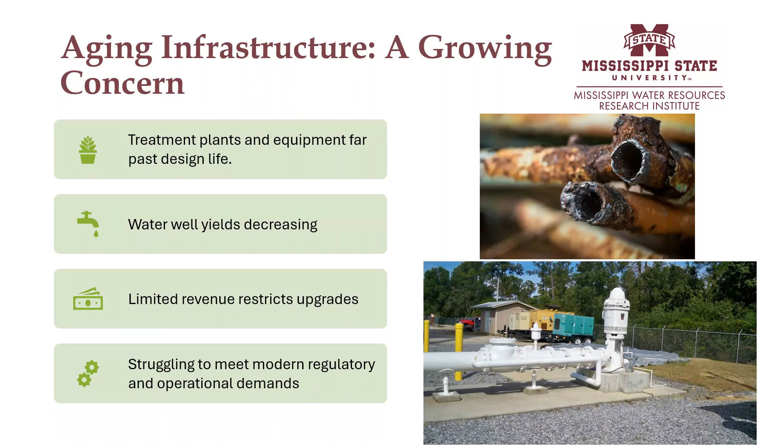Another thing is they're struggling to meet modern regulatory and operational demands. There's new regulations coming out annually, and it's a lot more intensive treatment than we may have had 30 years ago. So some of the key problems that I see in my line of work are aging treatment plants. That's what we can see. Pump facilities, those are obviously right there with treatment plants. Water quality degradation, whether it be because of distribution or storage, or the treatment itself. Distribution system deficiencies.

When you're talking about water age and the water quality throughout the system, it's all based on the treatment and how long it sits in the distribution, and how can we go about to solve these problems.

One of the biggest things that I see is antiquated electrical components. Most of these rural water systems that were formed in the 70s and 80s have honestly not upgraded their electrical components since then. And so a lot of them are falling behind, and they have issues on a daily, weekly, monthly basis with electrical problems, to where they're having downtime, and it's just causing major headaches.

Sanitary defects and contamination risk. Once the infrastructure throughout the system gets as old as it is, you start having problems with sources of contamination entering the system. Operational and customer impacts. I would say one of the biggest issues in Mississippi that we talk about these days are customer relations and the aging workforce. So we'll talk about these things.

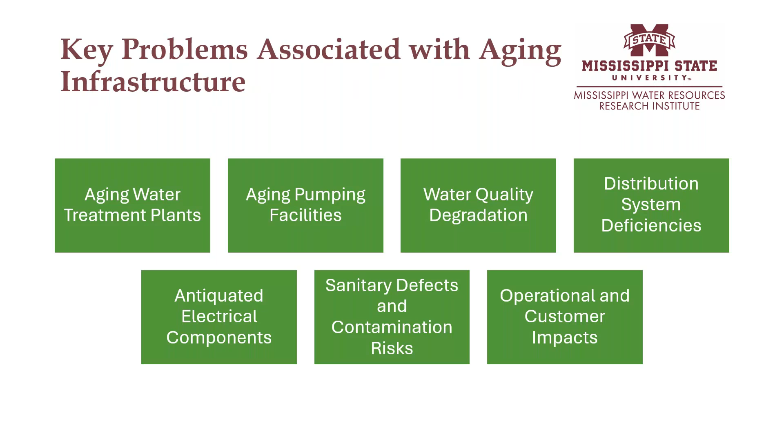So some of the technical challenges and solutions, like I said earlier, a lot of these water systems are operating beyond their intended design life. They were never designed to last 60 years without major upgrades. So they're starting to pose risk to water quality, system reliability, compliance, and public trust.

One of the biggest pushes over the past couple of years is the revisions to the lead and copper rule, which has forced a lot of systems to do this lead service line inventory. And not only does that bring awareness to service lines, but it brings awareness to the distribution in the water systems. So a lot of officials and operators both have begun to take note of what's in the ground, and now that they can see it on paper, it's really bringing to light how old stuff is and how bad a shape it is. So it's bringing a renewed attention to the issue of the aging infrastructure.

Some of the limitations: these treatment facilities were designed for water quality conditions that may have been, you know, from the 1960s, 70s, when they were designed. The regulatory standards were lower then. The system demands were lower.

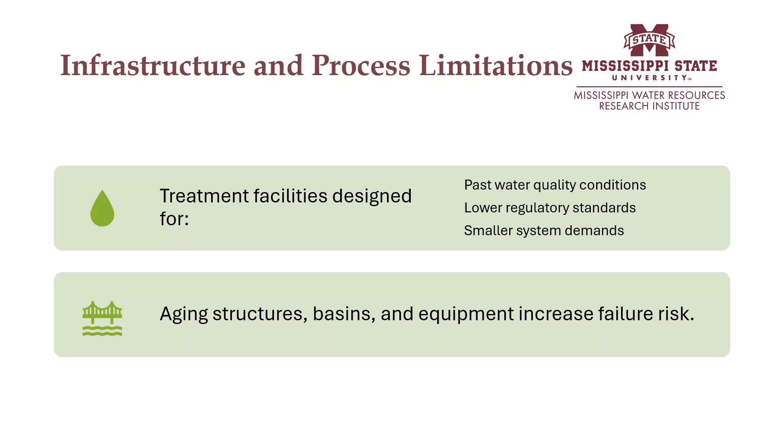Water quality compliance risks. When you have treatment that is not reliable, whether it be from filter media, whether it be from chemical feed pumps, whatever, at the treatment plant, you're going to impact your turbidity removal, iron or manganese removal, disinfection effectiveness, disinfection byproduct control throughout the distribution, your optimization control, and without redundancy, you're increasing your vulnerability during equipment failures, during maintenance activities, system outages, chemical process downtimes.

One thing I see more than anything is no redundancy on these small systems, and we can't preach that enough that these systems have redundancy, even just as simple as a chemical feed pump to have a backup. These systems have got to get the redundancy in place so there is no downtime.

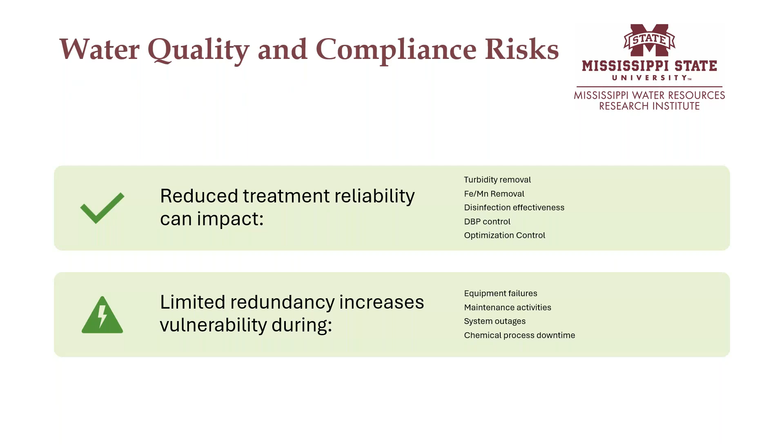Some of the operational challenges: you have obsolete equipment and controls, and those limit your process optimization, your water quality monitoring. You can't collect data properly. Without those things, it's hard to track what your treatment plant is doing. It's hard to keep track of what's going on in distribution. So we really need to have more up-to-date controls put in place to where you can properly monitor those water quality parameters throughout the system.

When you increase your reliance on your operator intervention, it increases operational risk. So it's more room for error. So the more an operator is in the treatment plant making changes to equipment, the more room for error that arises.

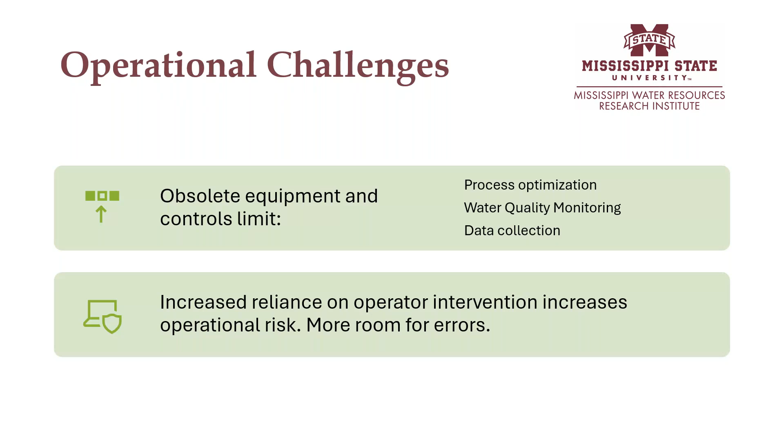Mechanical and electrical deficiencies. Like I said, pumps and motors are operating well beyond their expected service life. Increased likelihood of mechanical failure. Seals and bearings are going to go bad. Your electrical and control systems are going to fail.

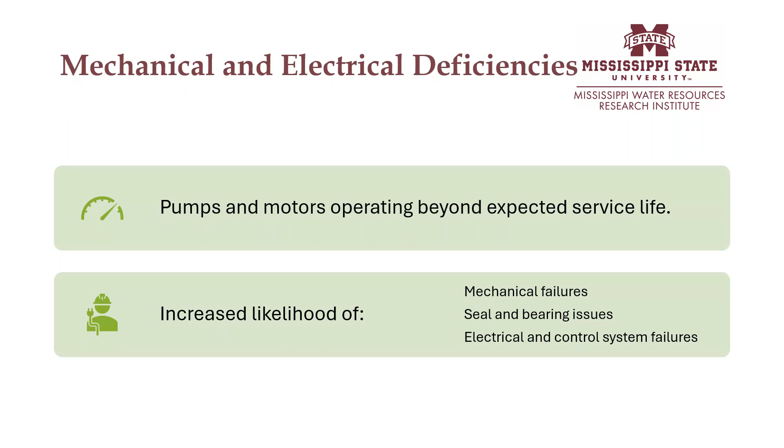Some of the hydraulic and pressure impacts you see throughout these systems, where you may have a 10-inch line that goes to a 6-inch line that goes to a 4-inch line. You're just going to have a lot of pressure fluctuations, and eventually, when you start adding more and more customers to these systems in places that cannot handle it, you're going to have low pressure events, and during peak demand, you're going to have outages or major impacts.

And when you overload these systems, it's going to lead to friction loss, which is going to lower the pressure overall, and ultimately you're going to lose your consumer confidence because people are going to be calling the system itself and complaining on a regular basis.

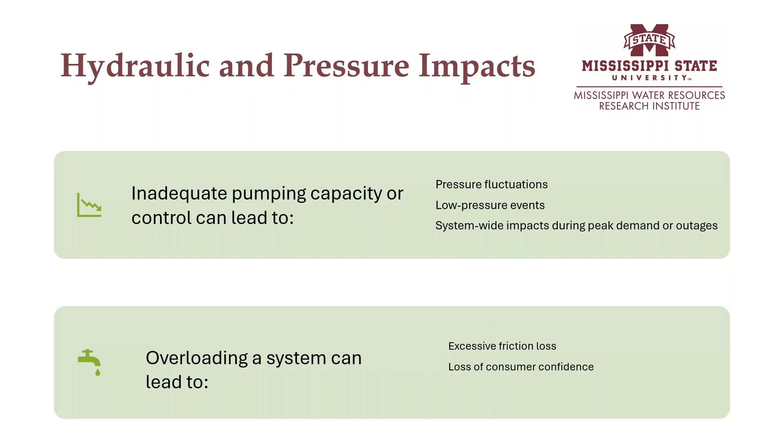So your hydraulic and design limitations: when you're talking dead end water mains and unlooped lines, it's going to cause stagnation, poor water quality, and increased flushing and maintenance costs. The aging pipes increase your leakage and break frequency. So there's a lot of systems.

I know the system that I live on here in DeSoto County, Mississippi, is kind of 3 or 4 water systems that were consolidated over time. So you have a lot of old water lines throughout the system, and I think there's a running list of about 200 or 300 leaks every month. So they have to prioritize which ones are worse to fix first. But it's a dedicated crew that works on these water lines on a daily basis just because of the age of the water lines in the ground.

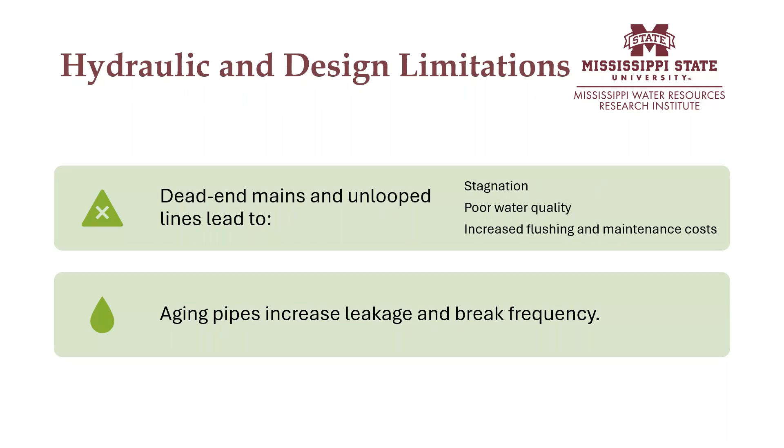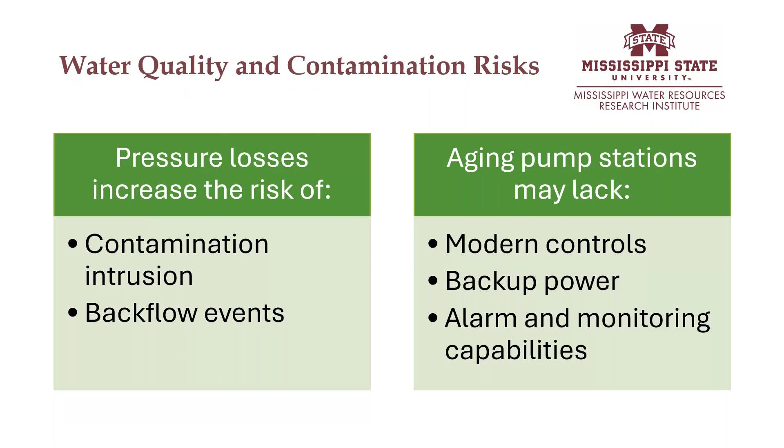Water quality contamination risk. Obviously, your pressure losses are going to increase the risk of contamination intrusion, backflow events. The aging pump stations may lack controls and backup power, alarms and monitoring capabilities. So your water quality degradation. We talk a lot about water age management when you're talking about DBPs in the system, loss of disinfectant residual, carrying a free chlorine deep throughout the distribution system. With the aging tanks and poorly mixed tanks, these issues will definitely worsen.

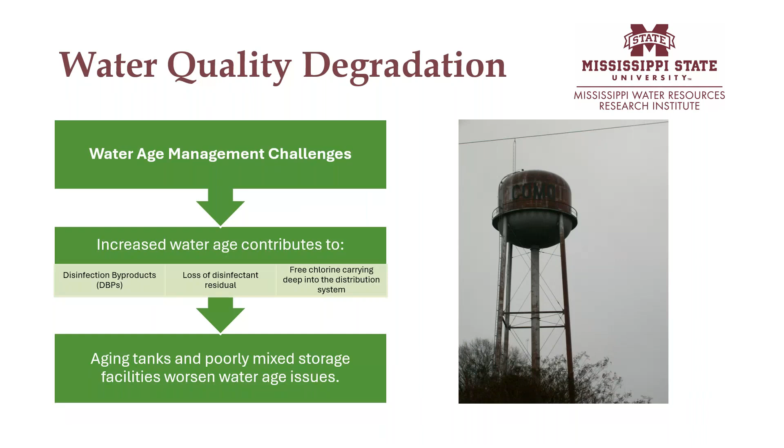Your operational control limitations. So when you cannot control where the water goes or where it stops, you have to take the whole system offline. And there's many systems throughout our state that are small, but they still have to take half the system or maybe sometimes even the whole system offline in order to fix a leak. So what we have recommended, when we go out and do some system mapping or these comprehensive evaluations, is areas where you can put control valves to help isolate certain areas so you can fix leaks and have repair zones and lessen your contamination events.

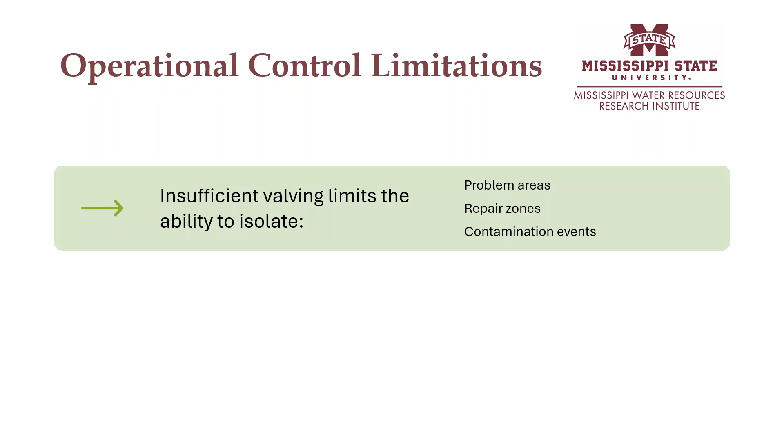Sanitary defects and contamination risks. From a regulatory engineering standpoint, I always think about significant deficiencies and sanitary defects at the treatment plant, when things start to degrade to a point where you have open holes in storage tanks and things like that. You're just opening these pathways for contamination, whether it be from animals, bugs, chemicals, it can be anything. So we really have to look at how we can stay on maintenance schedules to keep these issues from arising.

So when we're talking about water wells, the life expectancy is about 25 years. Now, that doesn't mean you have to drill a new well in 25 years, but it means you need to be planning to drill a new well after that, or plan to rebuild the existing well. Intake structures is 35 years. Pumping equipment is 10 years. Disinfection equipment, 5 years. Tanks, whether they be hydropneumatic, concrete, metal, can be anywhere from 10 to 30 years. Piping and valves, you're looking at 35 years. Controls and software, 5 to 20 years.

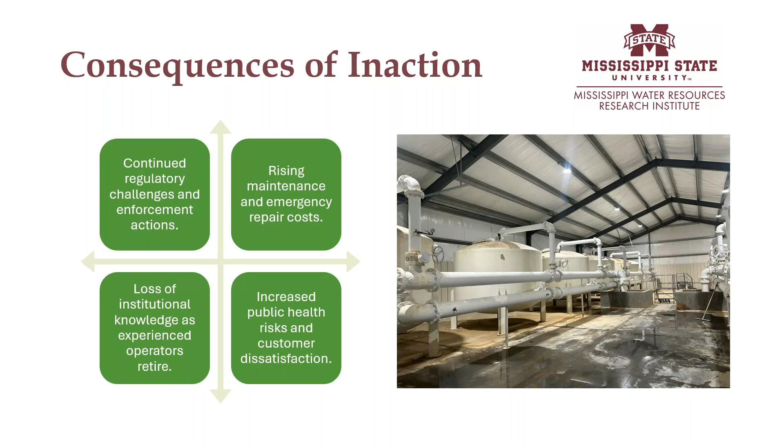So with all these things that we've talked about, what it boils down to is just a failing business. Essentially, you have to manage this as a business. So some of the solutions to address are infrastructure improvements, how we can make those, water quality and compliance strategies, planning, prioritization and funding, workforce and knowledge transfer, and customer and stakeholder engagement.

So when you're talking about treatment plant upgrades, the biggest thing we need to do is modernize treatment processes to meet current and future regulations. I think it's obvious with everything that is coming these days, we need to be ready for any future regulations that may come. Be flexible with how our treatment is, but at the same time be very efficient.

So we need redundancy for these critical treatment components. Whether it be service pumps, chemical feed pumps, we've got to have redundancy and upgrade monitoring controls and automated systems. Your monitoring controls are what's going to save you. You have to have the data to back you up to know what changes to make throughout the treatment plant.

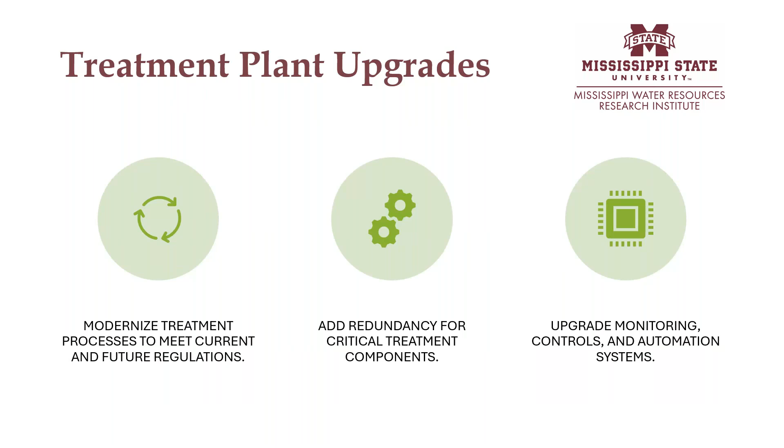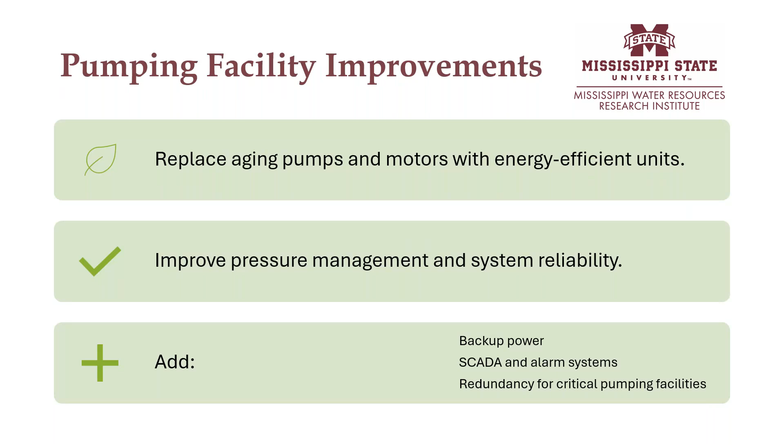Pump facility improvements. We can replace the aging pumps and motors with energy efficient units. Variable frequency drive motors have saved a lot of systems a lot of money by installing these on wells, service pumps, whatever it may be. They run when they need to, and they use a lot less electricity. We can improve pressure management and system reliability. We can add backup power on some of these treatment plants that may not have generators. SCADA and alarm systems can be put into place, and redundancy for critical pumping facilities.

Storage and distribution improvements. We can always loop distribution lines and eliminate dead ends. Some systems, it's inevitable you can't do that, but if there is a way to loop some dead ends and get rid of them, that is going to solve your water age problems throughout your distribution. And when you're doing these things, you can always add strategically placed valves to improve your isolation capabilities and reduce your service interruptions. We can upgrade storage tanks and install tank mixers so we improve the water quality and reduce the water age.

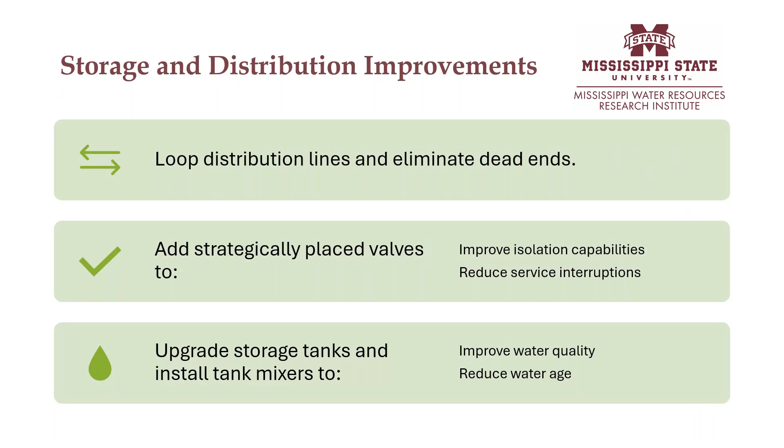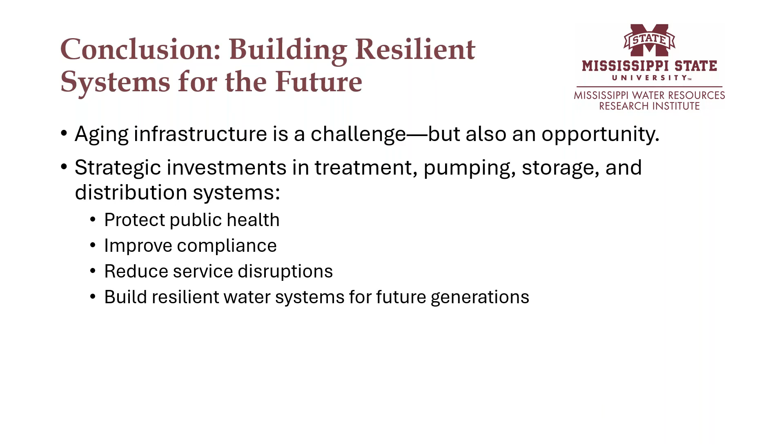Is there any questions or discussion? I'll hand it back to you, Zoe. All right, I'd like to encourage attendees to put their questions into the questions chat, but we do have a couple that have already started.

So the first question will be, a while ago, a student checked the Bureau of Labor Statistics. BLS showed utility operator as a shrinking profession with low salaries. That could drive young folks away. Can we work to change that? I believe so. As I mentioned earlier, Mississippi Rural Water Association here in Mississippi, they have an apprenticeship program, and I've really seen good things about that. It puts younger operators with some more seasoned operators to really share the tips and the tricks of the trade.

And I think one other thing we've talked about in the past is how we can implement operator training, whether it be in community colleges, whether it be in high school, vocation technology classes. We really need to do a better job at outreach, as a whole in the industry, to let this younger generation know that the opportunity is there.